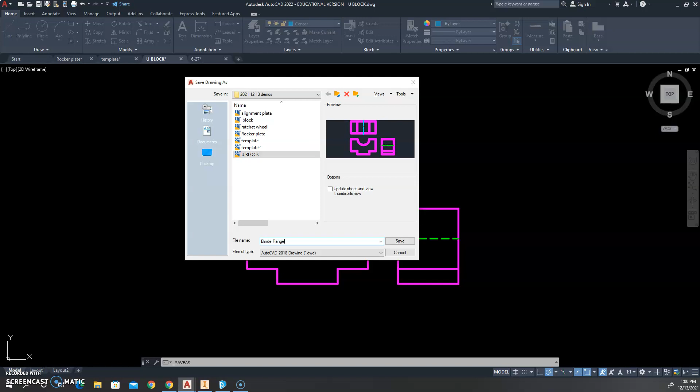So we're going to jump into the U-block drawing. We're going to use that basically as our template with all our line types and things like that. So here's our U-block drawing. So we're just going to click Save As. And we'll just save this here. We're going to call it Blind Flange. And we'll click Save. Alright, so now you can see our drawing title has been updated. Some of our colors are a little different for our line types, but that's okay.

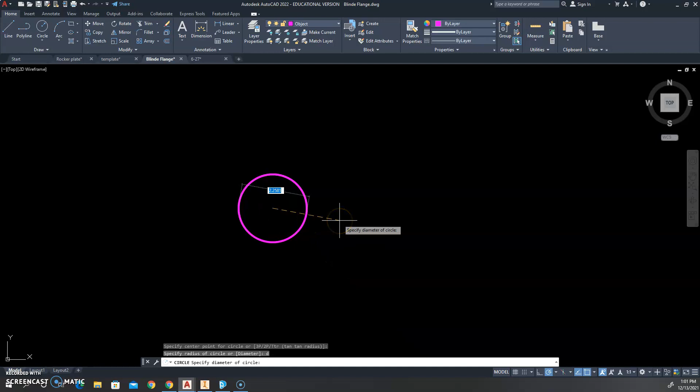Pardon me. Alright, so we'll switch to object for our line type. Now, again, our diameter is 6 1/4, so we're going to start off with a circle that is 6 1/4. So in order to draw that, we can either type 3.125 or you can hit D for diameter and type 6.25. And there's our circle. Now, in order to do this, it's relatively quick and easy.

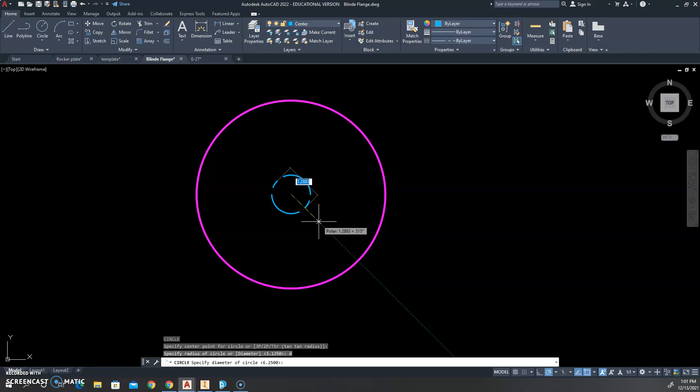We're going to do our centerline circle as well. So we'll do circle. And we're going to do D for diameter. Now this is 5 5/8, so in decimals that's 5.625. There we go. And there's a few different ways you can do the center lines on this. Go back over here and we're going to draw our first circle. I always like to start on the left. That's just me. And again, diameter of 0.5, radius of 0.25. There we go.

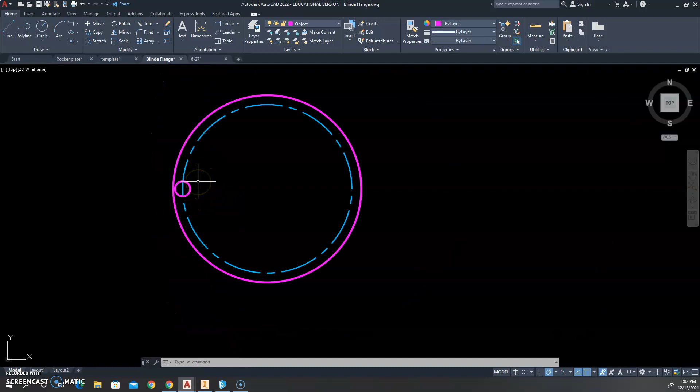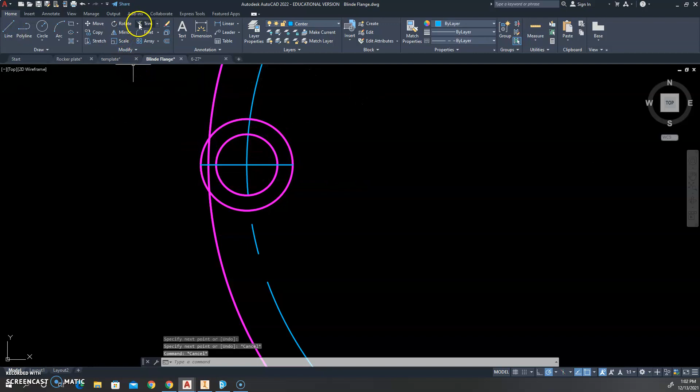And then we've got a few options here. We can do individual center lines for each, and basically what that would look like is we would come in here, we would offset this about 1/8 inch. And then we would switch over to our center line, draw a center line across so that we've got a radial center line. Then we would just use the trim tool and remove the rest of that circle. So we had a nice little arc here.

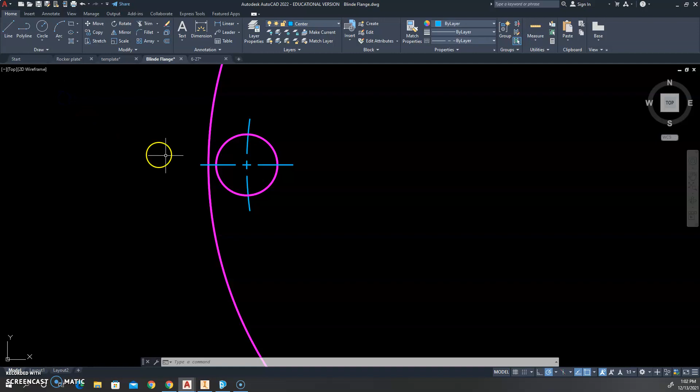We can get rid of our guide circle, and we can adjust our line type scale. Bring that up into the screen. And we'll lower that. Let's try 0.25. This is pretty small. Okay. We've got that. And then we can array this.

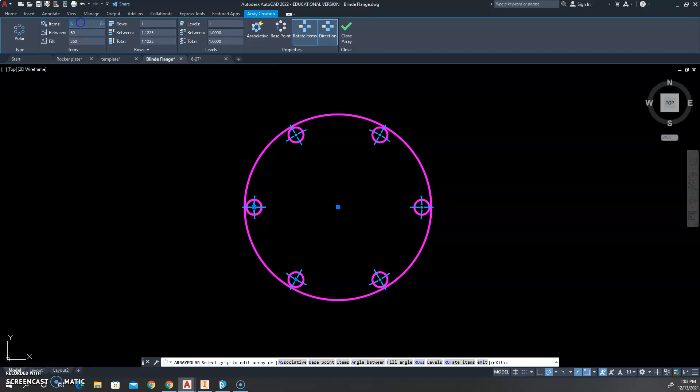So what we'll do is we'll go up to Array. We'll hit the drop down. We want a polar array. So select objects. Select our circle plus our center lines. We'll hit enter, and then we want to find the center of our big circle. We want to make sure it's not associative. And we want to have 6 total items. We can click close array.

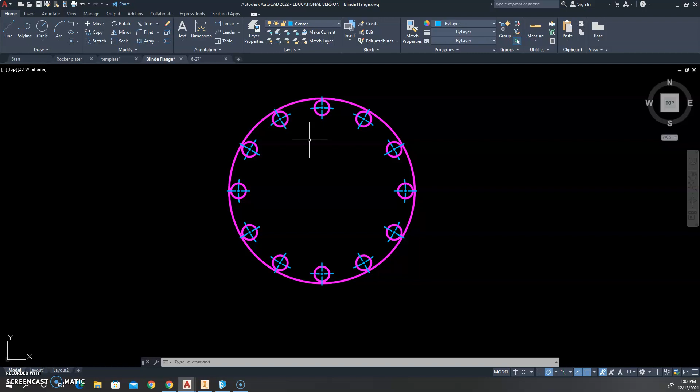Now, we could have that. The only issue that I have with that is that the center lines kind of hang over the edge a little. It just doesn't look neat. It doesn't show that the holes are on one continuous circle. So a better way to do it is actually just how our original drawing is set up, where there's one big centerline circle there. And so that's what we're going to work with.

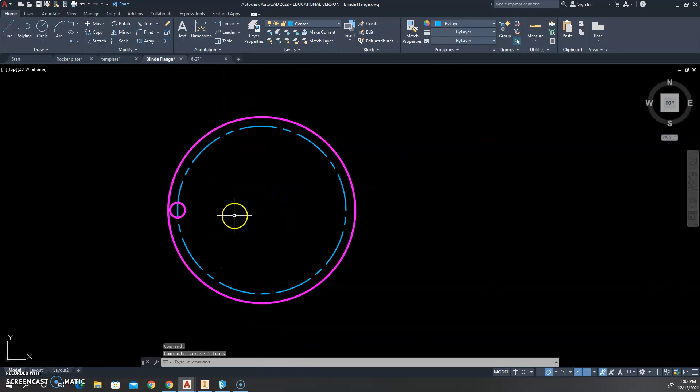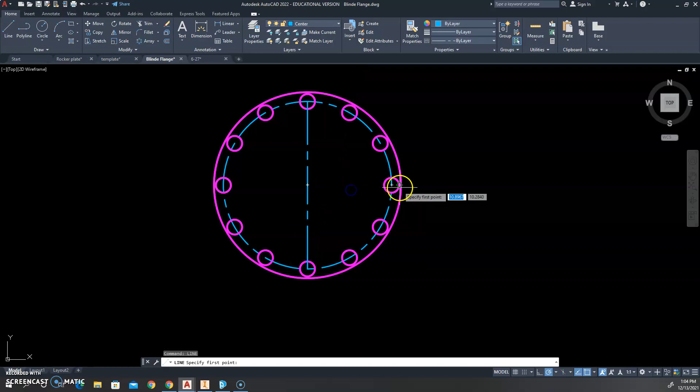So we'll just back up a little bit more. Okay. And then we will just delete our little outside circle here. So the only thing we need to array is the circles. So we can just click that, and we'll click in the middle, and we again need to adjust to make sure it's 12, and make sure it's not associative, and then click close. And now we can just continue with our center lines here, top to bottom, left to right. And that view is essentially done.

Next, we want to put a little space between our views, and we're going to do our right side view. Or again, you could do a top view. It doesn't really matter.

Best way that I've found to do this is use the zero layer to sort of set up some guidelines first. So we're going to go right at the very top of our circle. Just kind of go across there and go right at the very bottom. There's other tools you can use to do this, but this is just a good way to start.

Object, and we'll just draw a vertical line to the right here. Again, the spacing between the two at this point doesn't really matter. We can set it up later. So we're just going to hit trim, and we'll just lop off these circle edges here.

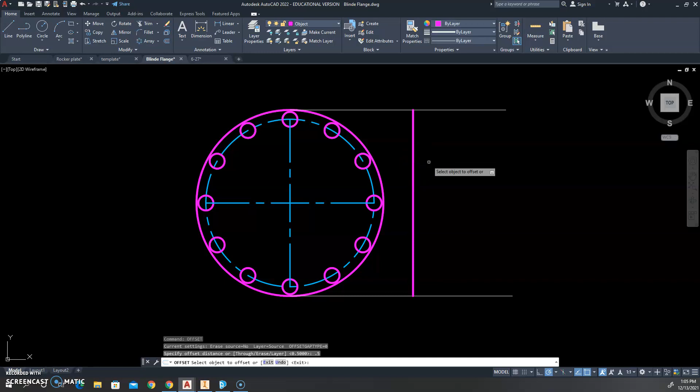And we're going to offset that 1/2 inch. The reason why we're doing that is, again, our plate thickness is 1/2 inch. So offset 1/2 inch. We'll just offset this line to the right. We'll just draw a top and a bottom to this while we've got it available. And then we can get rid of those two guidelines we drew.

Now, when we're representing holes inside of an object where they're completely embedded, but they're sideways, we're taking a round thing, just like we've done with our whole plate. It's going to be represented as a rectangle. But this time it's going to be made out of hidden lines. And there's going to be a lot of things here.

So from our right side perspective, these two holes will line up with each other. So we don't really need to represent one. Same thing with this pair, and this pair, and so on and so forth. So what I want to do is we're going to start off with just one completed hole. And that's going to consist of two hidden lines, one for the bottom edge of the hole, one for the top edge of the hole, and then a center line through the middle.

So to do that, we're going to switch to hidden, and then we're going to just zoom in here so it's a little bit easier to work. I like to just kind of find the bottom quadrant of the circle and just bring that over. Do the same thing here. Okay. And we'll do our center line. We'll just grab that from here.

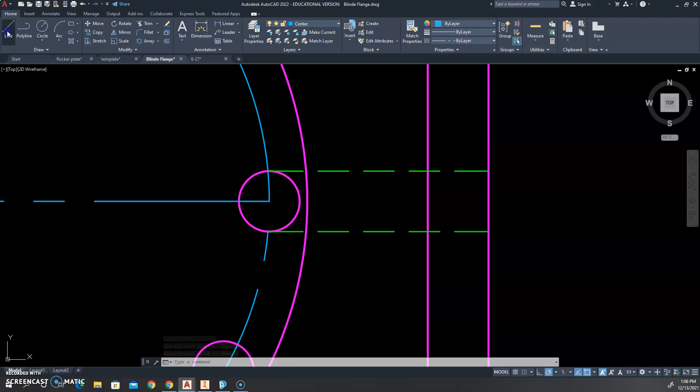We'll come in with our trim tool. Just remove those line segments, and then any extra lines that we kind of left hanging out over here, we'll remove them. Now the center line on this hole needs to be stretched out 1/8 inch in each direction, or 0.1 works as well. Again, it's as long as it's even and it's consistent. It really depends on the scale of the drawing.

Now, we got to do two things here. We need to decrease our line type scale on our center line so that it gets a dash. So let's do that. So we'll select it. We'll hit Properties. And we're going to lower that number. Try 0.5. Not quite enough. Try 0.25. And that works for us.

And I really want to do that same thing on our hidden lines as well, but not so extreme. So let's do Properties. Let's set that. Let's try like 0.5. I like that. That looks good.

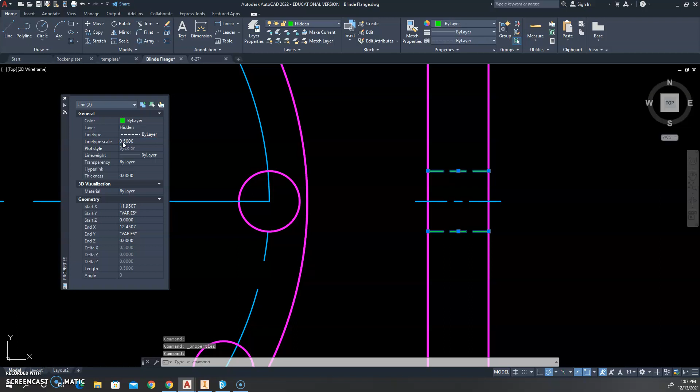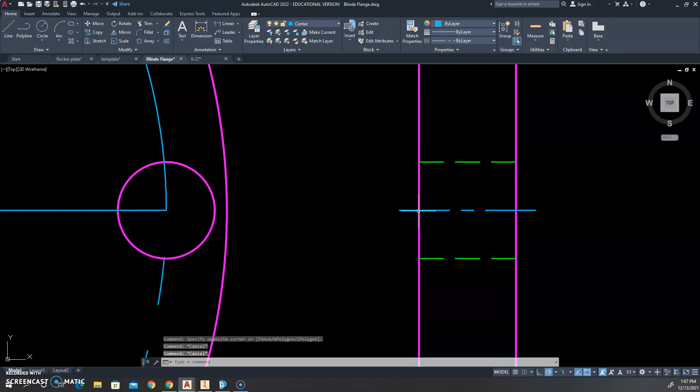Now what we can do is we can use some guidelines to sort of position these holes. So I'm going to be copying these three lines as one from this point right here where the center line intersects the left side of our side view. But we need to know where am I going to paste this to. So let's use our zero layer, again, just kind of as layout.

We'll just go from the center of each hole to the left edge of our view. Again, going directly to the right, letting that green dotted guide angle help us. And we'll do that from there. Again, just repeating this process. So essentially, you know what, for now I'm just going to do this one too. So you can see I've projected each and every one of these holes over.

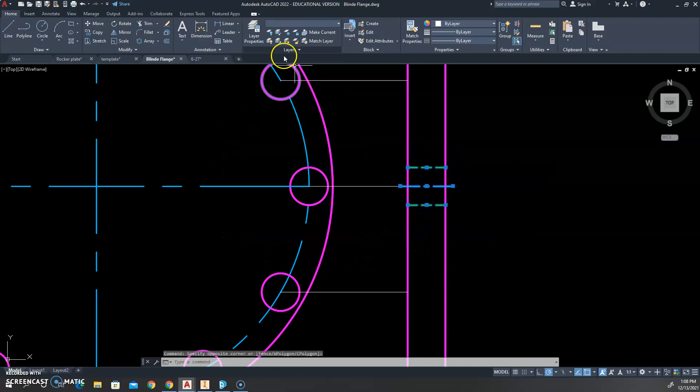And what's going to wind up happening is some of these are going to overlap. So when I go to copy this, I'll click copy. We're going to select it right here, again, where the center line is intersecting the left edge, and we just make sure we've got all three. And everywhere one of these white lines touches, we're going to place it. You can see it gets a little bit messy up here, but that's all right.

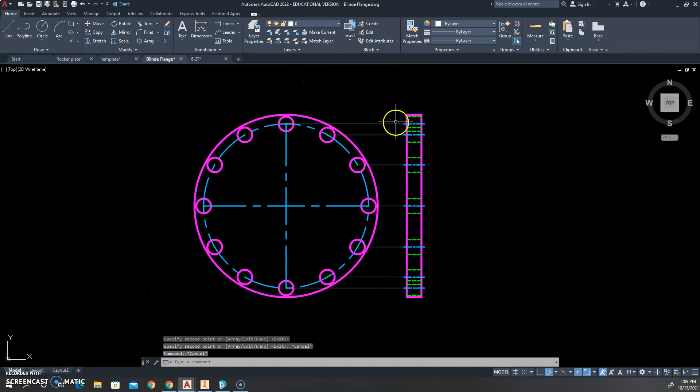We just kind of remove the white lines. And there it is. Our blind flange is complete.